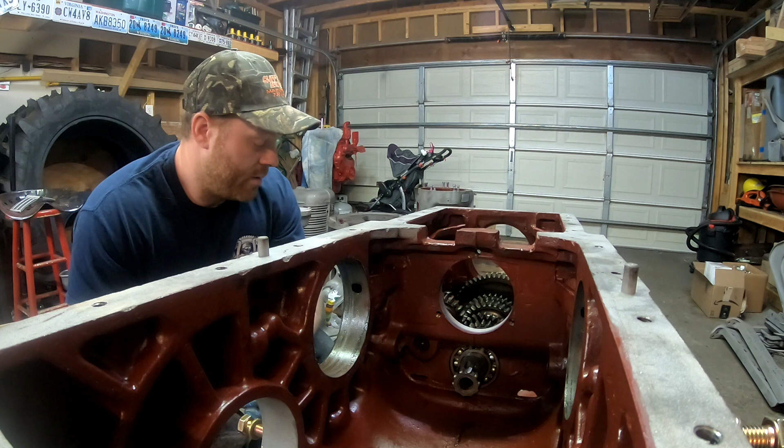We're going to get everything shimmed up and then match up the ring and pinion gears. So first things first, I've already greased up the mating surfaces on both the transmission case and the differential carriers.

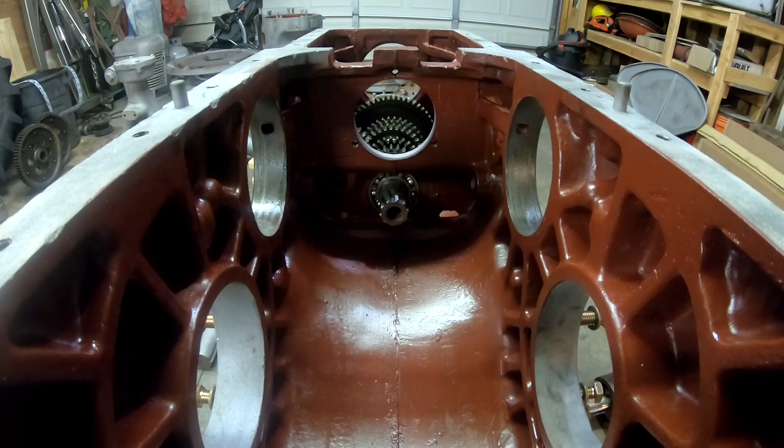So what I'm going to do is, let me tilt the camera down just a little bit, move it over so we can see what's going on here. I'm going to start with just barely inserting and aligning the carrier on one side. Now when I say aligning, I'm just making sure that the bolt holes in the carrier are aligned with the holes in the transmission case.

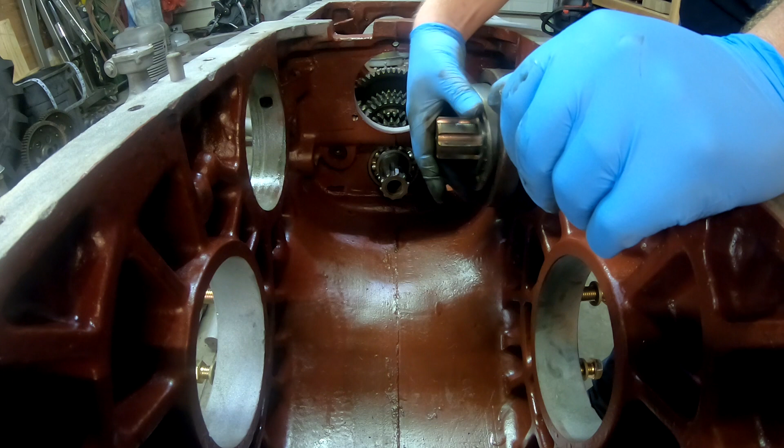So we'll put a couple of temporary bolts in it. Now I've got this set up with one thick and two thin shims on each side. I'll insert the bearing for the differential. Let me grab my drift and hammer. Well, that's not going to work. I'll just give it some light taps until it's seated in the carrier. There we go, we're seated.

Now, before we can install the other carrier, we need to install the differential. So we'll lift it into place. Get everything aligned. There we go. Now we can take and install the other side.

Now I'm not going to lie to you, I did have everything together once already, but I made a couple mistakes. For one, I installed the differential backwards. So the ring gear was over here. Now that's all well and good if I want to have 5 reverse speeds and 1 forward, but in order to install it properly, it needs to be on the right side, or I should say the brake pedal side of the transmission case.

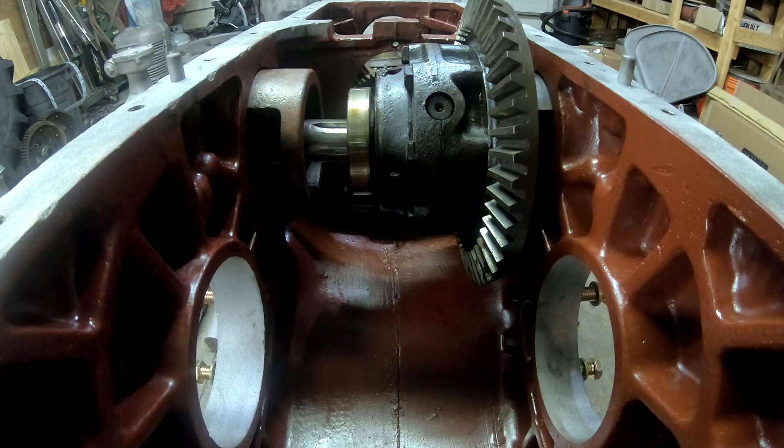So because I already had this together, I already established where I need to be as far as my shim packs go to remove any side-to-side play of the differential. So basically you don't want to have any side-to-side play of the differential carrier, but you also don't want to put any stress on the bearings because they're not a tapered roller, so you can't adjust preload on them. There we go.

Now I should be able to tighten these down some and bring everything together. So I'll start with the one side here. Just kind of going a little at a time, until we get everything aligned as far as splines go. And I can tell they're aligned because I can turn the spider gears inside the differential.

So we're going to start putting our bolts in. Here, let me move the camera. I'm going to start putting our bolts in around the carrier here.

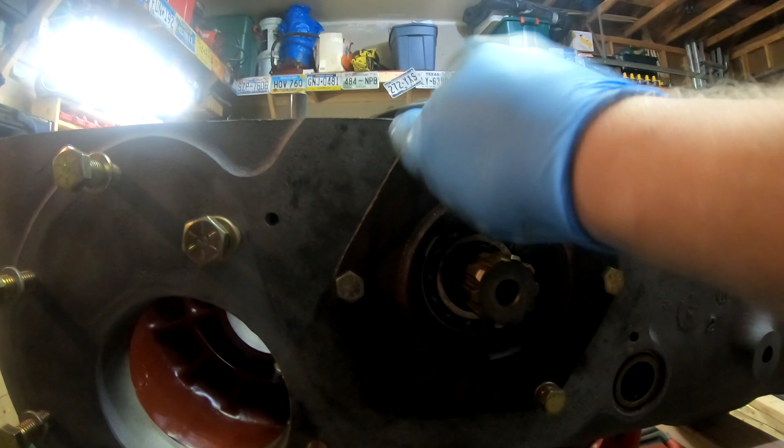I wish I was not holding the camera because I should have my chest mount out here, but, whoops. Getting a little overzealous with the old fingertips here.

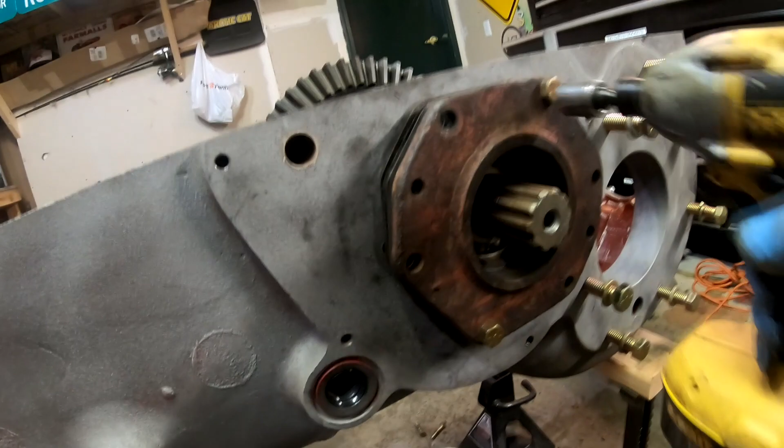Alright, so that's one carrier installed. Now we can start pulling this one in. Basically just enough to where I can get the other bolts started.

etc. Because in order to get these shim packs right, it's going to take a few tries, and the more we install these and take them out, the better chance we have of tearing up those rubber sealing rings, so it's more beneficial to do it without them in place. Okay, so now our differential is installed.

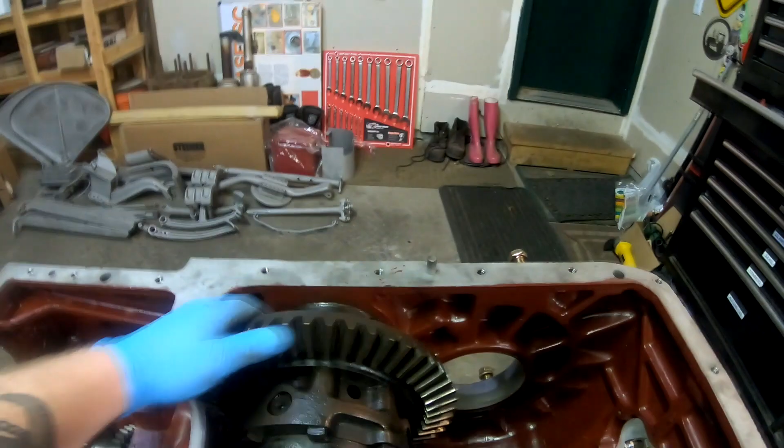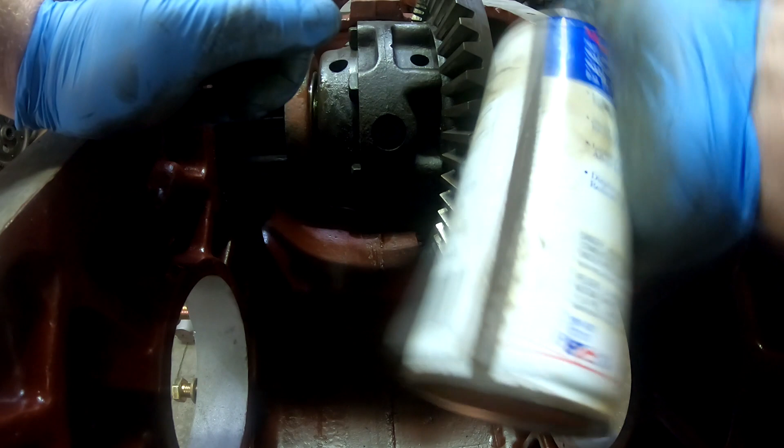And we probably could put a little bit of lubricant on the bearings to help things along. This is just a general purpose spray lubricant that I'm using. So I'll just spray it liberally in the bearings, give it a few turns.

Now, from the research I've done and from what I've read, you do not want any side-to-side play. If anything, you want just a teeny tiny bit. And the way I've got this set up, there is barely any end play. Let me grab our dial indicator. Whoops. And we'll see what we got for end play here. Zero it out.

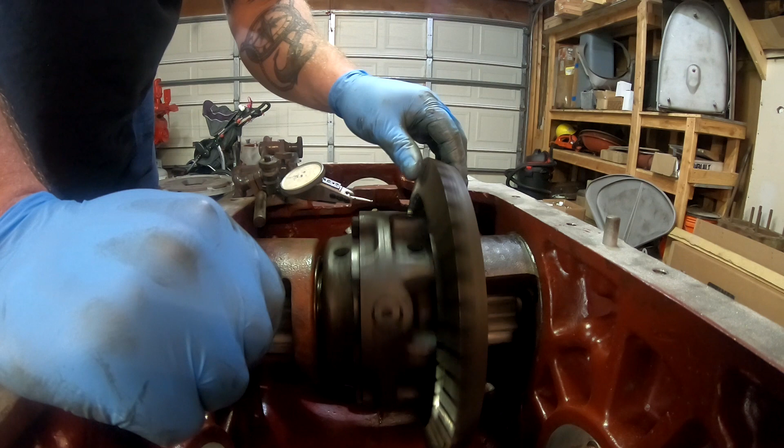and just going off of ear, there's a very, very, very tiny ticking in there. I mean, I can barely hear it. So go ahead and set our, let me get this thing so I can see it here. Get it zeroed out.

And what I'm doing is I've pushed it all the way to one side, zeroed it, and then I pull to the other side. Rotate the gear about 180 roughly and do it again just to see where we're at. So push it all the way to one side, make contact and zero it out.

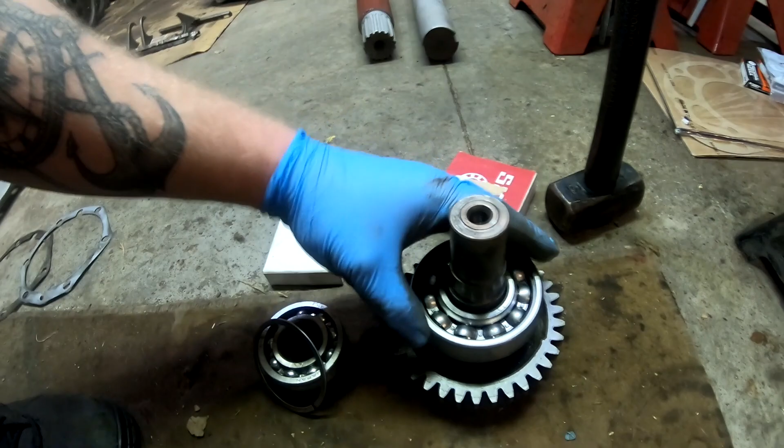So let's go ahead and keep moving. Next we have to install the pinion shaft, and in order to do that, I first have to finish driving on the new bearing for the front here. So we'll go ahead, finish driving that on, we'll get our front bearing on, and then this is the input shaft.

So the input shaft itself actually has 3 bearings. There's an outer for the front, then there's a middle bearing, and in the rear there's a pilot bearing that goes inside here that rides on the end of the pinion shaft itself. So we will drive this on with a brass punch, get it seated, install our spacer on top, and then the front bearing, and then we can slide the top shaft or the pinion shaft in place, and we can check our lash, our contact pattern, and all of that. So stay tuned for that.

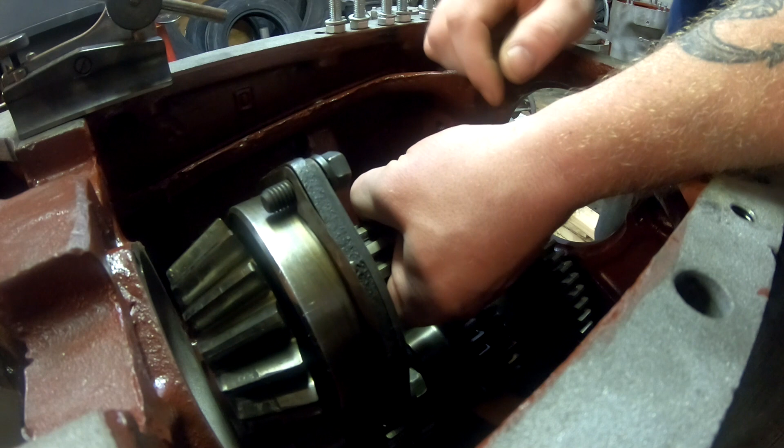Okay, again, this is all kind of trial and error for me because it's been so long since I've taken this apart. But essentially, this top shaft or pinion shaft has 2 shims on it that came when it came apart. So there's a thick and a thin. So we're just going to install it with both and see where we're at. Oops. It's a challenge getting the bolt holes lined up perfectly, so there we go.

Grab my wrench. See if I can move the camera here. That way we can get a better angle.

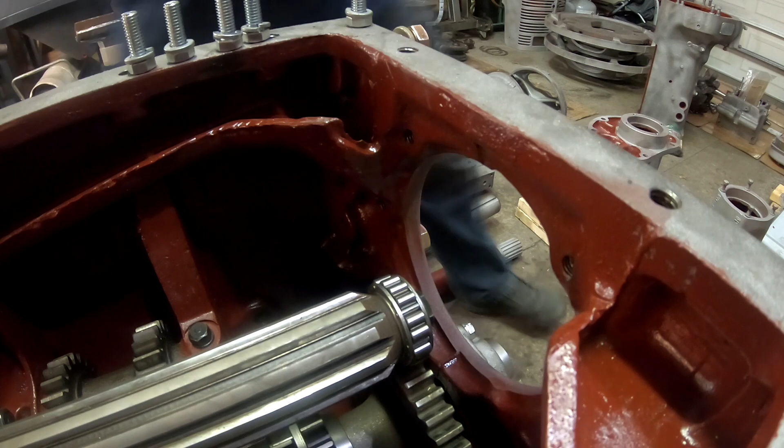So at this point, we can slide in our input shaft and install the carrier. Now I'm thinking, if I remember right, I do have the gasket in place as well. And on this carrier, there is an oil flow hole, so make sure you get the gasket aligned with that. Oop. Now I gotta get my bolt out of the bottom.

But actually, what I think I'm gonna do, let me do some thinking here. I think this front bearing needs to be installed with the input shaft carrier. So let me do some trial and error, and I'll get back to you. I'm so unorganized.

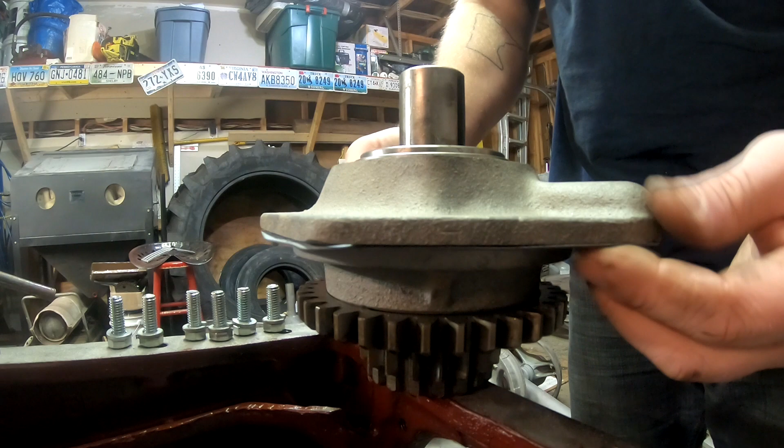Okay guys, this is the easiest way to do it. Install the carrier over the shaft and then put your snap ring on the front. Take the gasket as a unit, slide it into place, tilt the camera down so you can see, slide everything into place, and install our bolts.

Now I don't have any of the top shaft gears in place, simply because it's going to be easier to work around inside here without those gears in place. Oh, hold on. I've got the carrier upside down. So we'll spin it. Get it back in place. There we go. Now we're cooking with fire. Oop. There.

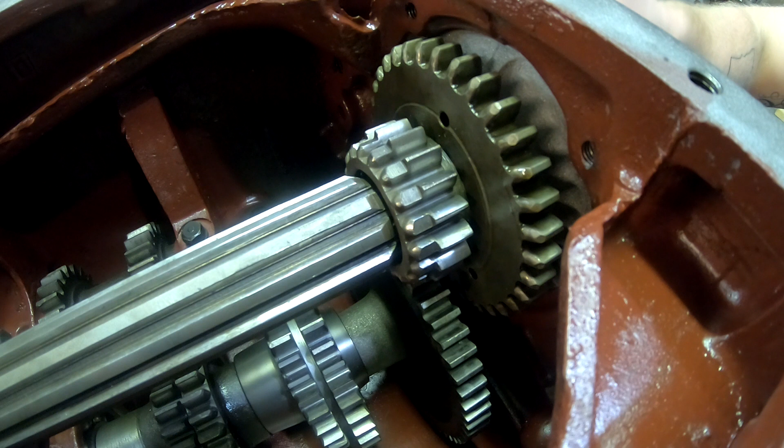Sometimes it takes a little bit of moving things around to get it properly seated. So we replaced the front pilot bearing and then the front carrier bearing on this assembly. And there is a bolt on the end of the top shaft with a special washer that holds that pilot bearing in place. And it is common for that bolt to work itself loose. I've heard some stories of that happening, so I did put some Loctite on that bolt.

I put some Loctite on that bolt and tightened it to what I felt was a good amount of torque or tightness, and we'll hope for the best. But let me grab a socket. We'll tighten these bolts in the carrier up and see where we're at.

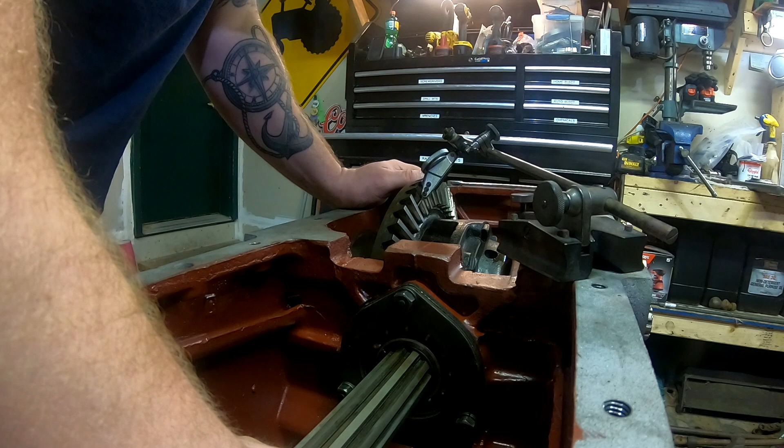Okay guys, we've got everything tight and set up. Let's check the backlash real quick just to see where we're at. Now I'm holding the pinion shaft in place and just very slightly moving the differential, and the gauge measures.

Now specs call for 6 to 12 thousandths of backlash, and we've got probably about 10 thousandths or so, which isn't bad at all. That's right within the spec range, especially for a gear set that's probably original. So we're right at about 10 thousandths.

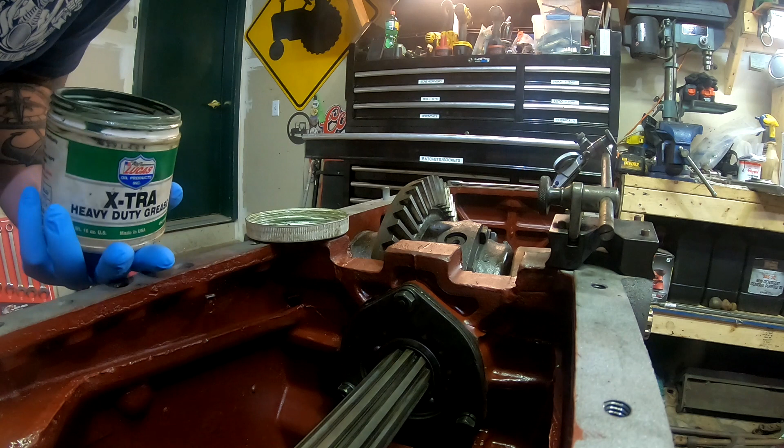Let's go ahead and put some grease on the gears, and we'll see if we can check out the wear pattern at all. Or I'm sorry, the, oh, come on, Squatch, help me out. The contact pattern. Okay. Let me grab a couple of gloves. Now some guys use a type of paint marker to check this out, but you can use grease. There's nothing wrong with using grease to see where we're at on the contact pattern. Well, let me let the air compressor run, and I'll get some grease on this stuff, and we'll start recording after that.

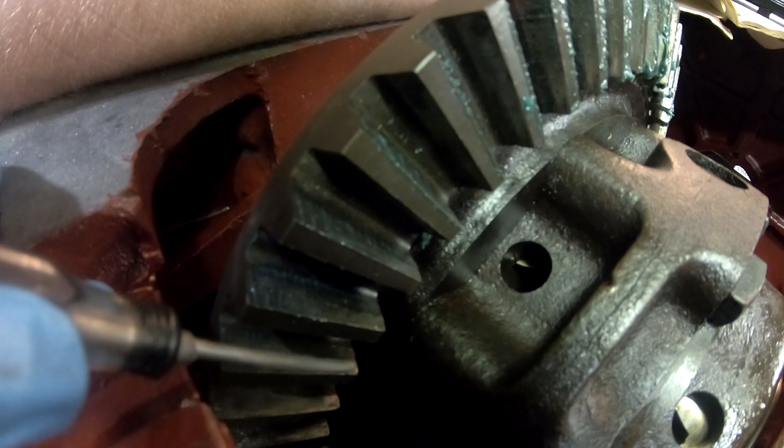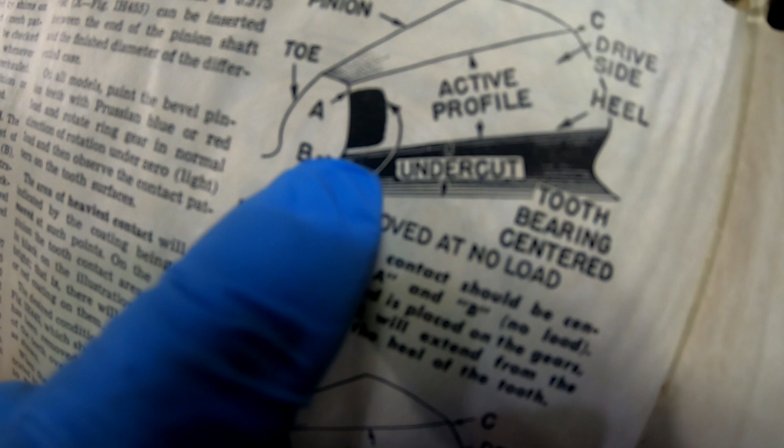Okay guys, I'll try to explain this as best I can here. Now I got my service manual out, and it states that to set the correct gear lash or contact area, you should be looking for your removal of grease near the toe of the gear, which is the inside of the ring gear, and it should be from an area here. Maybe I'll just show you in the manual here. So it should be in this area would be your contact pattern.

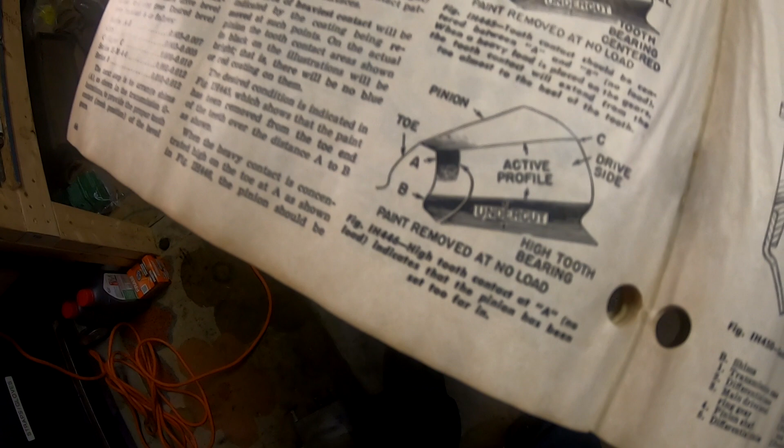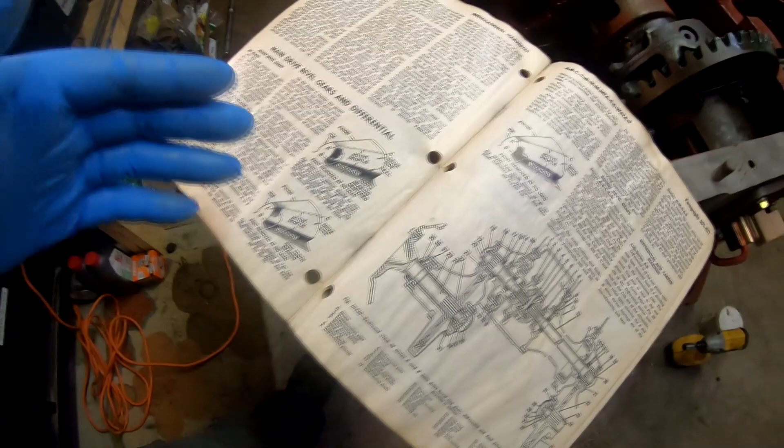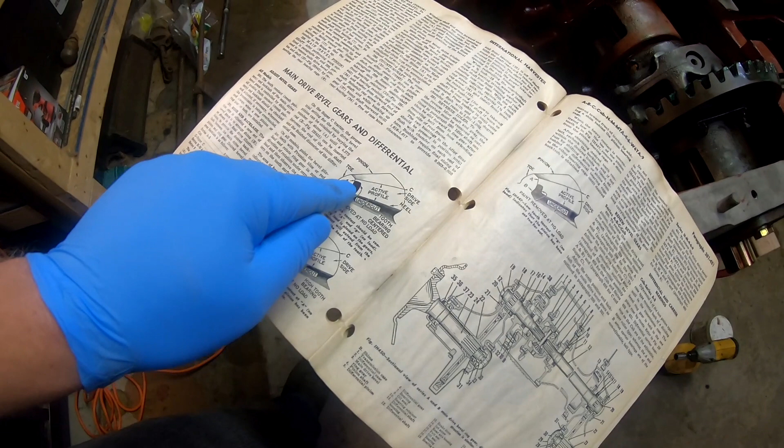Now if you have a high contact pattern like this, then the pinion shaft needs to be moved forward, so you need to add a shim to the front of the shim pack here, which goes right in here. Now if you have a low pattern, then you need to remove a shim and slide the pinion shaft back, which then raises the contact pattern into this area. Now this is designed to be done at no load, because when you put the gears under load, this contact pattern area will extend to the outward side of the gear. So when it's under stress, the teeth actually will deform, and the contact pattern will extend all the way out.

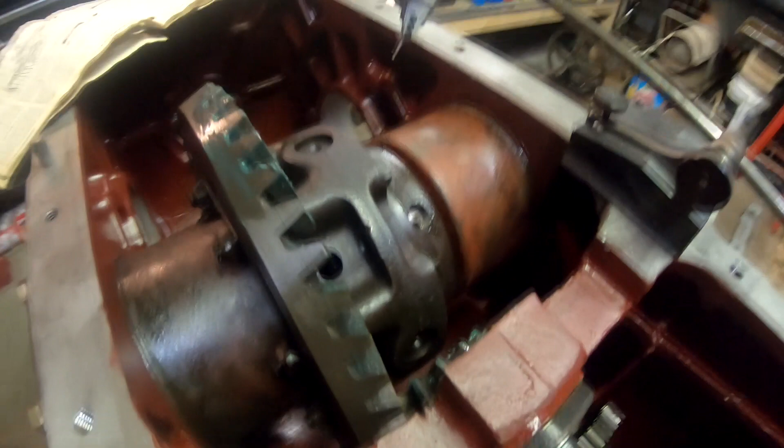So let's go ahead and rotate this through. I've already done it. Using grease, it's a little bit trickier, but we'll kind of look to see what it does as far as rolling this thing through. So we'll just roll it through all the way. Oh yeah, we're sitting really good. So our contact pattern tends to, I don't know if you guys can see that, but it tends to lean a little bit towards the bottom. So it angles in, but

Let's rotate it through one more time, see what happens. We'll check the area. Well, now we're just smearing grease, but see if we can get a little on there. We'll move it through again. All right. That should be good enough. I already got a rough idea of where we're sitting, and it's in a nice position, so I'll come back around.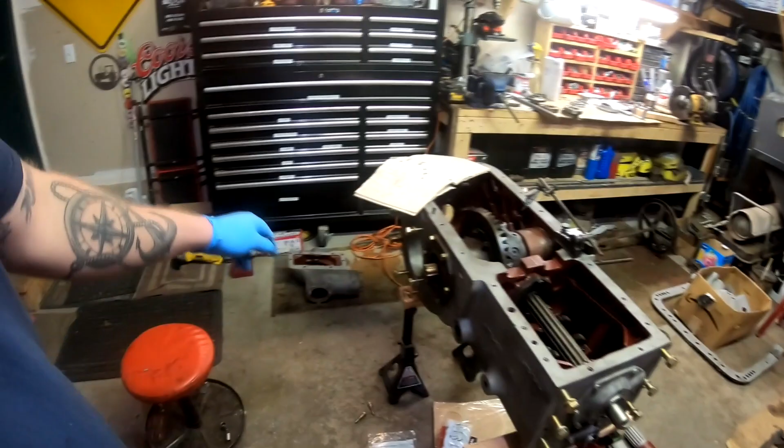We can assemble the axles, get those ready to go. We can get the shift forks on the bottom side of the transmission cover and get those ready to go. The belly pump is ready to get put together, and the belt pulley as well. So I think we're going to finish up by installing the sliding gear set and putting our gasket sealer on the gasket itself, and then buttoning up the seal carrier for the front here. So let's go ahead and get this shaft out and we'll install the gears.

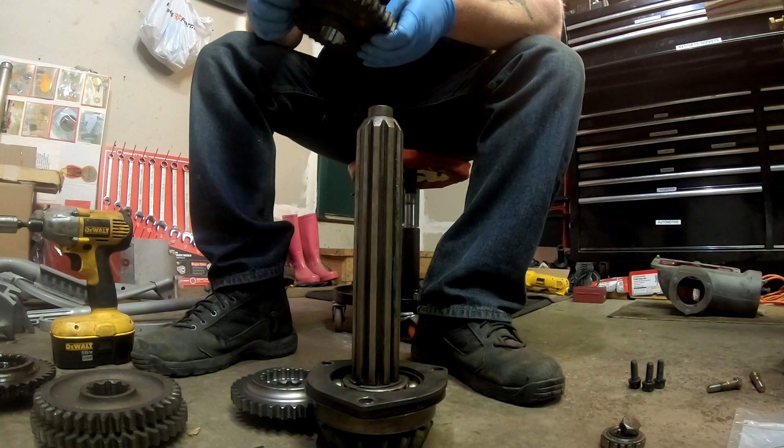Okay guys, we're going to go ahead and slide the gears in place. So we go with the large gear first, and the shift fork collar always goes towards the rear. Okay, so that's our first gear. This is second and third. And then we got a brand new gear from a donor. This is our fourth, fifth slider. And then we can install that pilot bearing on the front. Now I did put more Loctite on this bolt for the bearing. So we'll tighten that up as soon as we get it installed.

So we'll get the front in first. Kind of position the gears like so. This is a challenge to get everything aligned. And I keep dropping stuff, and that doesn't make it any easier. And where did my washer go? Okay.

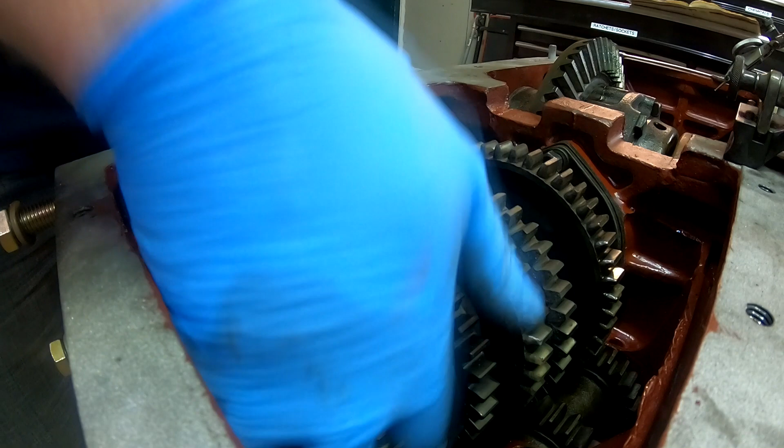Definitely tight quarters getting it all in here. But it is doable with some wiggling. So we'll get everything installed loosely. And now we can install the input shaft. Oh, before we do that, I gotta tighten that bolt. So let's do that.

Now in order to do this, what I'm going to do is I locked up the differential and just gave it enough to make sure it's tight. I just used a piece of scrap steel and wedged it between the teeth. So this input pilot bearing is secured. I'll put a little grease on it to help things along.

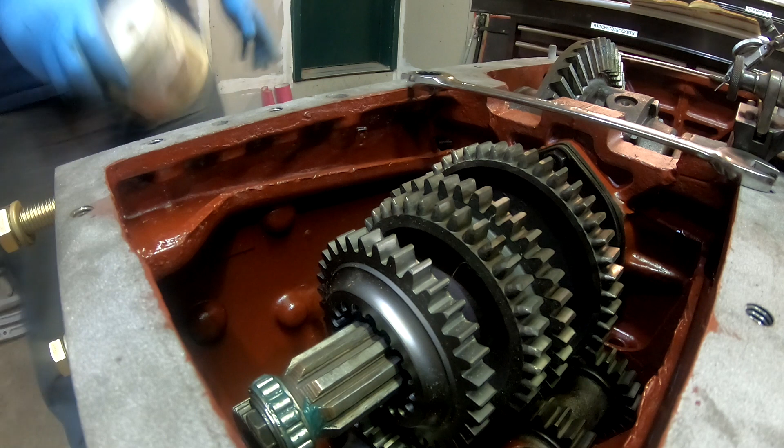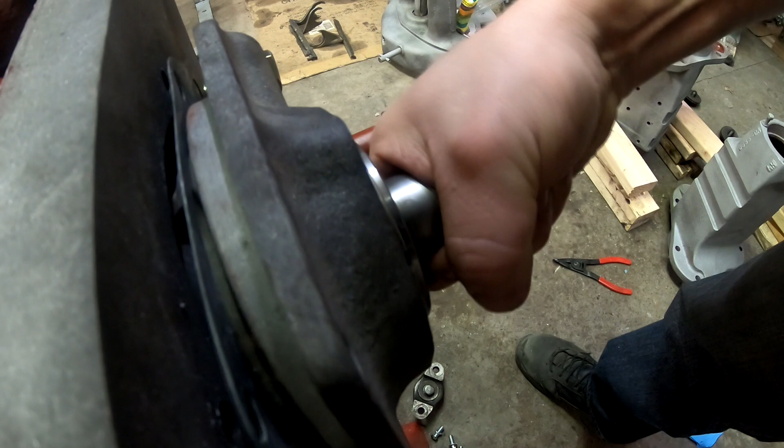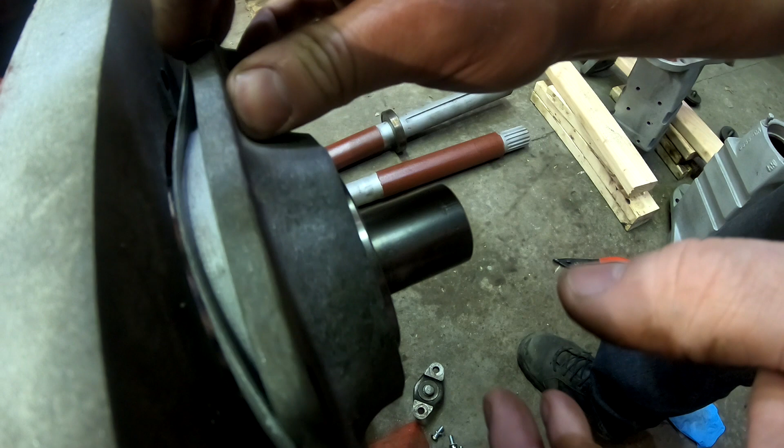Okay. And now we can spread our sealer on the gasket for the input shaft and install the input shaft. So let me get that done with the gasket sealer and we'll move on. Okay, our gasket's in place. We're going to go ahead and insert the input shaft. Get everything rotated into position.

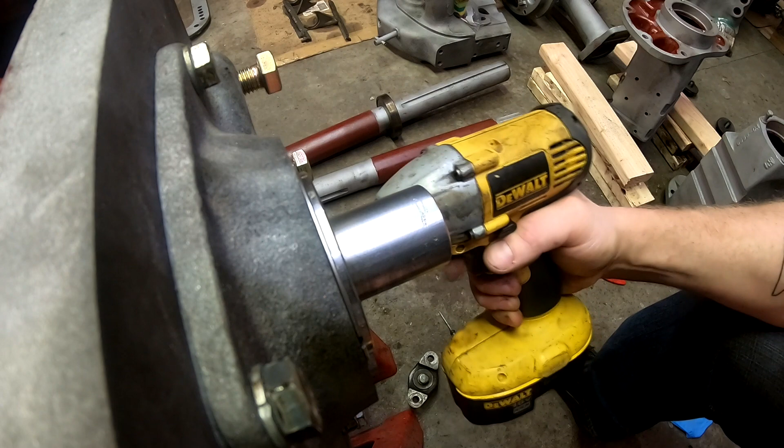Be nice if I had a stand kind of like Squatch has for X231 and 5J1113. This thing kind of rocks back and forth just a little bit from the round bottom. I'll go through and snug these up, and then we can install the seal carrier on the front here and the yoke for the drive shaft, which is right here. Alright.

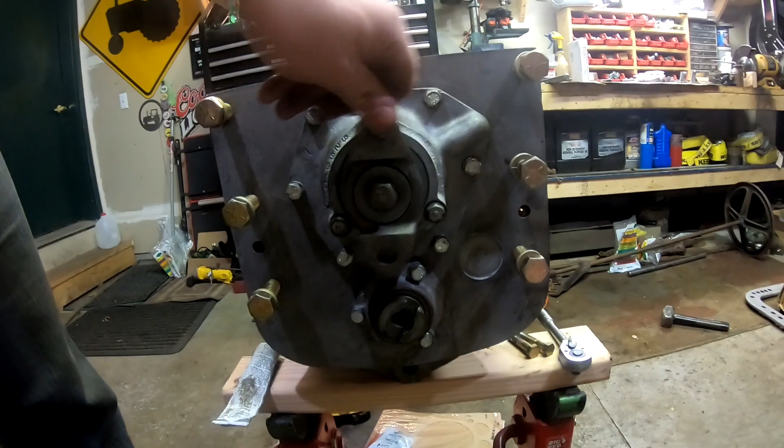Okay guys, I think that's going to do it for this video. That was the, let's see, I guess differential, pinion shaft, and top shaft and sliding gear assembly setup. So we are all sealed up on the front side. We've got our yoke in place. I still have to tighten the coupler for the hydraulic pump, but I think I'll just grab a brass punch and give it a couple whacks, tighten it up, and then we'll be done.

Oh, I also did pick up a new expansion plug. I installed it in the access hole for the reverse idler gear shaft, and I used Loctite when I installed it, and after I punched it into place, then I took some RTV and I went around the recession here just to help seal it so we don't get any leaks there.

So that's going to do it for this video. Hopefully it was not too difficult to follow, but we got really lucky as far as the differential. You know, we only had to take it apart essentially twice to try two different shim thicknesses, and then with the pinion shaft, the shims that we already had, one thick and one thin, was all we had to work with, and luckily the first time we put it together everything turned out okay.

So from this point I think what's next is we'll finish up the hydraulic pump. All we got to do is install the pump in the reservoir, and then from there we'll move on to the rear axle assembly. So that'll be ready to go. And last we'll put the shift rails on the bottom of the cover. And that should leave us with just the belt pulley. So that's what the plan is. So I guess at this point I'm going to stop the video because I don't want to get too much in a video, because then it just tends to be too much happening in a short amount of time. So that's going to do it.